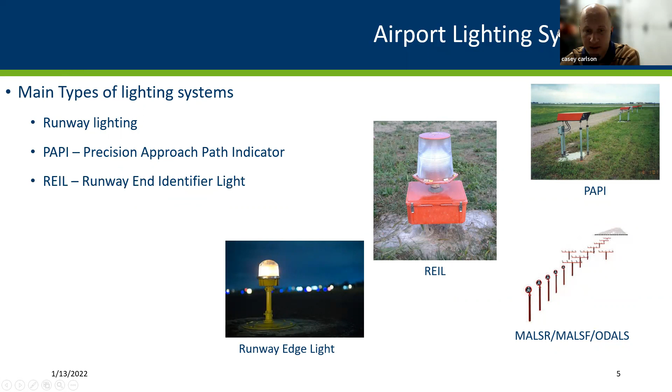Okay, here's some pictures of our airport lighting systems. Some of these fixtures you've seen out on the airfields - your edge lights, the lights up in the top right corner there. Excuse my coffee drink. Runway end identifier lights, REILs. And then in the bottom right corner, you have some of those MALSRs, MALSFs.

So sometimes these acronyms can be a little intimidating. If you sound out what that MALSR and MALSF is, it's not that technical - it's just a medium approach lighting system. The R and the F on a MALSR or MALSF are referring to the amount of flashers leading into that array, that approach lighting system. So that's kind of a brief overview of what you might see for airport lighting out on our sites.

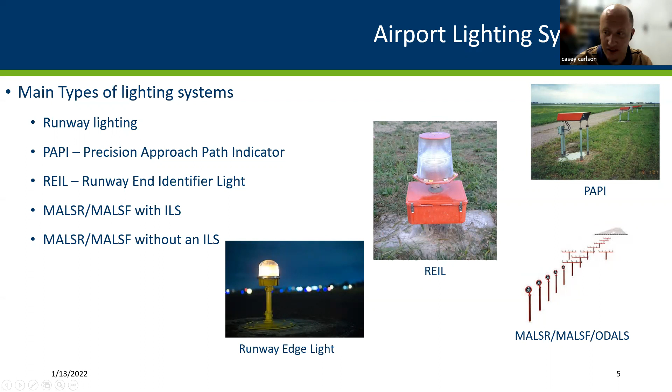I wanted to add that the purpose for those MALSRs and MALSFs is to reduce the required visibility needed to land during inclement weather. Whereas a runway edge light is showing you just the perimeter of your runway, your landing surface, those MALSRs and MALSFs are meant to gain your attention if you're a pilot coming in toward an airport in foggy or low-visibility conditions from snow. That would be the purpose of our MALSRs and MALSFs, to lead us into where we're trying to get to. We'll talk more about that coming up.

Whether it be PAPI lights or simple edge lights, how would somebody new to the industry know which airports have which types of lights, and how can we differentiate between key, intermediate, and landing strip types of airports? A couple pictures there - MSP, of course, on the right, is one of our state's largest airports. Off to the left, we just have a landing strip from a private airport in the Lakes area, Park Rapids area.

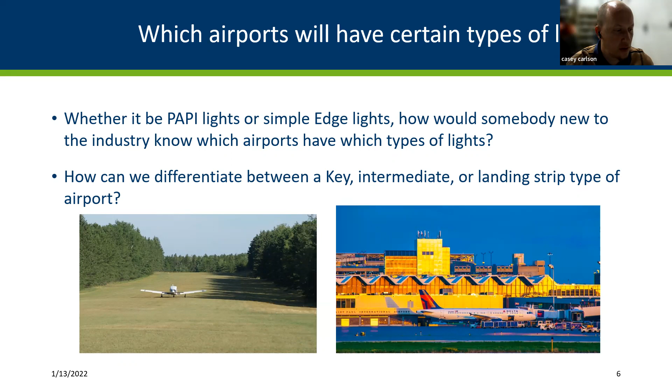Categorizing our airports into three groups: we have key airports, intermediate airports, and landing strips. If you can see in the illustration, our key airports are generally going to have an ILS as your precision instrument approach. So think of our larger airports around the state - they're the ones that would generally have an ILS.

Intermediate is the most common type of airfield we have across the state, with a vertically guided instrument approach - so we may have GPS or RNAV there, if you guys are familiar with those terms. And then, of course, the visual approach, like that grass landing strip in the previous slide.

So let's go through some of our smaller scale airports - what would we expect to see there, maybe lit or unlit. Lighted runways consist of runway edge lighting and end-of-runway lights. Generally, I'd say there's 8 lights on the end of each runway, split into 2 groups of 4, and the globes are positioned appropriately so that you can see green or red depending on what direction you're facing at the end of that runway.

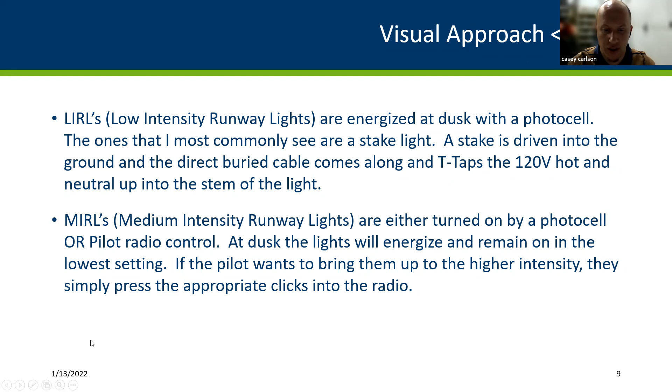From a troubleshooting standpoint, a LIRL is going to have a 120 volt, more conventional circuit that somebody could relate to wiring in their home, to a receptacle. It's a 120 volt circuit with a hot and a neutral. When we jump up into those MIRLs, that's where we get into the safety factor of a regulator and a constant current circuit, and there's a lot more safety concerns in dealing with that. So you do want to have a good understanding of it before you get your hands anywhere near that stuff for safety's sake.

Our intermediate airports have everything we saw on the previous sized airport, plus some additional things. It's our most common type of airport, with 63% being an intermediate. 24-hour 100 low-lead avgas is desirable, so generally we'll see that on these type of airports.

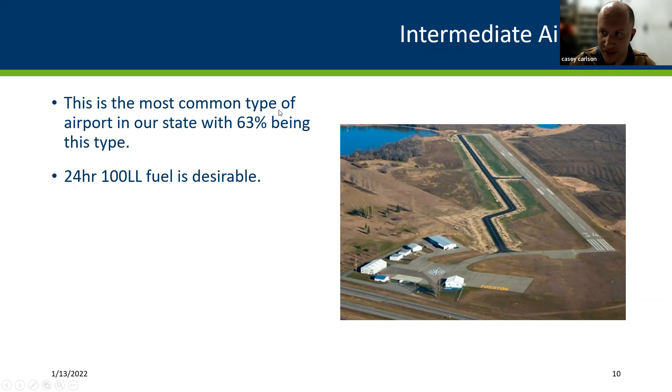Paved, and at least 1 instrument approach. In addition to all the lighting systems at a visual only strip, there's an expectation that intermediate airports will have PAPIs and REILs, if you remember those from the beginning of our slideshow. We'll speak more about those coming up.

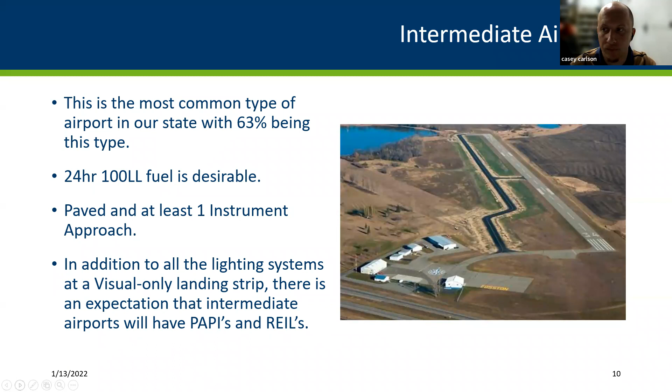Key airports have 5,000 or more feet of pavement, designed for heavier aircraft. I was stating in yesterday's presentation that I always think of a runway landing surface just needing to be a certain width and length to get those larger aircraft in, because they need more room to take off and land. But one thing I forget is that you've also got to have better or thicker materials to handle the weight of that aircraft as it's touching down.

A Key Airport has all the systems of that intermediate, and there's an expectation that the MIRLs will be upgraded to HIRLs on the runways associated with ILS. So some of our key airports will have a crosswind runway on the airport to supplement if aircraft come in and aren't going to use the main runway.

That main runway is going to have high intensity runway lights, and your crosswind might just have medium intensity runway lights. The distinction for a pilot's perspective is that high intensity is going to have 5 click settings for the pilot controlled lighting. So if you were a pilot coming in, you'd have 2 additional intensity levels aside from your low, medium, and high that you'd see with MIRLs.

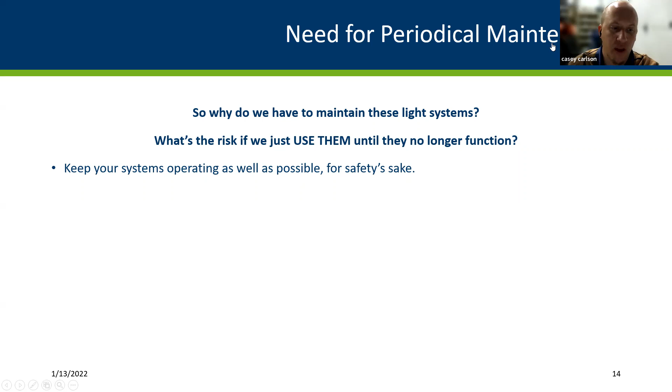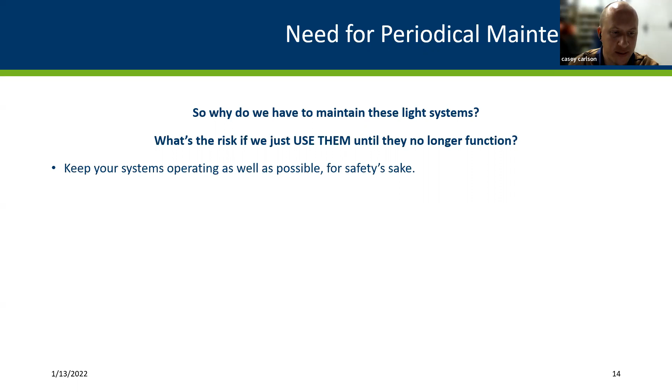Well, we want to keep our systems operating as well as possible for safety's sake. Pilots use these visual aids to assist in their travel throughout the airport, especially at night. And if a pilot controlled lighting system is unusable, it may create hazards and should be NOTAMed out immediately.

Skipped assessments of lighting issues tend to snowball into greater problems. We also want to keep our systems bright and shining to take pride in how well you can get your airport operating. It's the first impression people get about your town when they touch down at your airport. So if somebody's coming in on business and they see some of your lights are out, and then they return for business a couple weeks later and some of the lights are still out, that's something that gets noticed. And just how well you've removed snow in the winter, how well you've upkept all of your grass alongside of your lighting - all things that paint a picture of what your community is about.

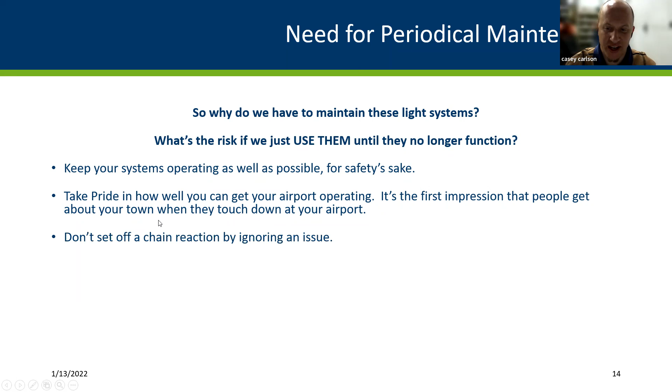We encourage not to set off a chain reaction by ignoring an issue. The human body is a great example - if you get a scratch on your arm, a week later you can't even tell the scratch was there. But on an electrical system, there aren't many self-healing type systems. So if something starts to fail, it's going to continue to fail, and it might not be the only component that fails - it may cause other things to fail. So something to be aware of.

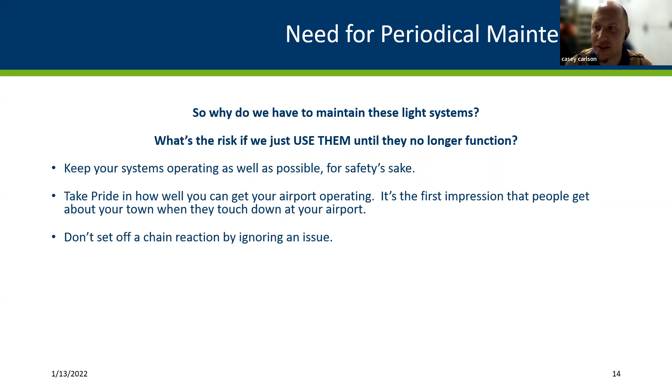Grumpy pilots equal less business opportunities. If pilots see that repairs are not being made in a timely manner, they may seek the services of a neighboring airport instead of your airport. So that's one set of eyes that's constantly touching down and evaluating, and can see if stuff is being well maintained. Pilots, of course, when they get together in the pilot's lounge, they talk about what they've seen and what they are seeing.

How often should we be checking? By having a maintenance program in place with a good calendar, you will be much more successful keeping up with everything. We want to encourage that you have some sort of calendar reminder on your phone or something to tell you that there are periodical checks that need to happen on some of your more technical lighting systems, such as PAPIs for one, and also those approach lighting systems. We're going to go through some of that here coming up.

So, a lighting maintenance plan is a good tool we can use to assess the status of our lighting system, determine if we are still meeting the design standards, and keep up with our lighting system maintenance before surprises cause shutdowns and costly repairs. A well-maintained lighting system will save you money by helping to avoid surprises. You'll know how much you save the first time a contractor comes out and charges big bucks for something that could have been addressed earlier during normal hours.

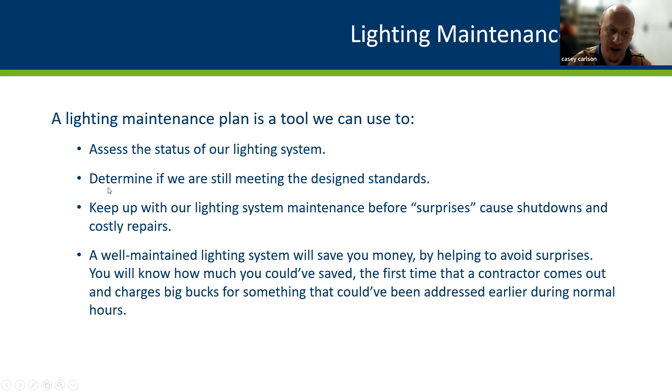So let's take a look at a few points from the FAA advisory circular, which we will use in designing how we will maintain our airports.

So here I've included a chart out of the advisory circular, and it's talking about edge lighting in particular, and what we would want to do on a daily, weekly, monthly, semi-annual, annual, or just unscheduled basis - do it when you can do it. But it's important, especially for the landing strip and intermediate airports, that you're going out in your vehicle and checking your lights as often as you can. And when I say as often as you can, not 4 times a day, but try to make it out there daily if you want to know what's going on and get a pulse for your airport.

A lot of times I imagine it's easy to come in as an airport manager, jump in the office, fire off 71 emails, and then do some work on something you had going from the day before. But it's important that we get out there and do our checks to know how our systems are working. You can see there are certain things that need to be checked monthly, semi-annually, and annually - those are the big ones, the ones we want to have in our calendar to remind us when we've got to get out and do those things, like alignments for your PAPIs. We'll get to those on the next couple slides here.

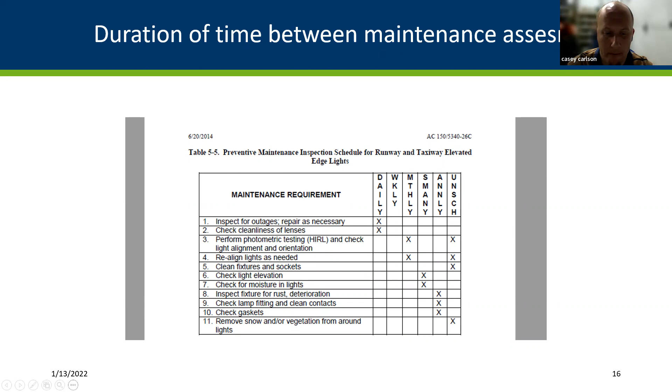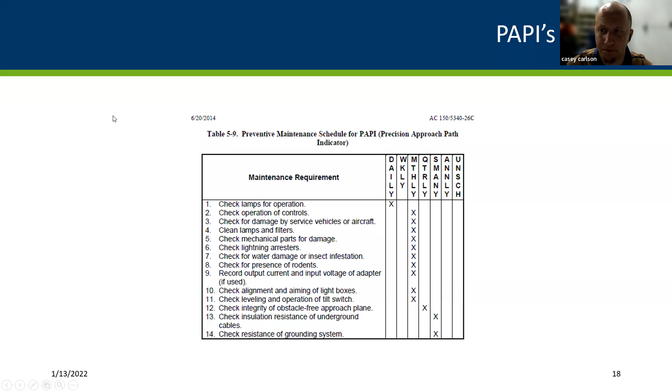Okay, so you are out on an inspection and you find something that's broke. So you have a broken component. Is there something more serious going on? What needs to happen? Make sure to notate your repairs in the logbook to track work performed. And this is paramount in isolating repeat problems that may become more of a sign of something more major that's happening.

So if you don't record what you're doing out there for your repairs on your airport, you might have a component fail and think, I just changed that last month, or I just changed that last week. What's going on? And then you look back on your chart to see how long ago you fixed it, and you have nothing marked down. And it's hard to isolate. You have to take good records so you can tell how your system is performing over time, and if you have a repeat problem. We don't know if a larger problem is looming due to a failing section of the system.

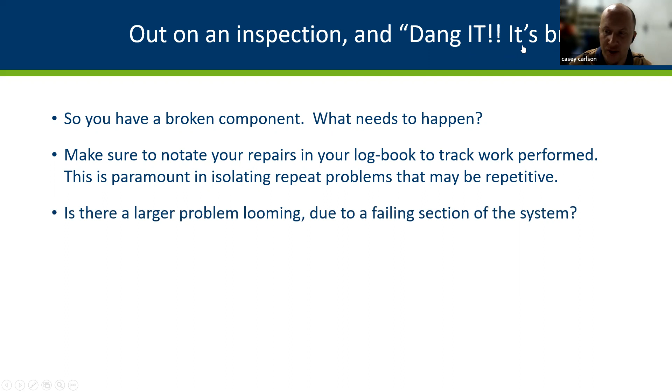And of course, you airport managers out there can reach out to us if you need help. From a pilot's perspective, though, you're going to get in touch with that airport manager to report anything that looks out of ordinary. And the airport manager can then use their staff to take a look at things and call in a local contractor or an airfield-specific contractor if they have a problem that is beyond the scope of day-to-day maintenance.

I want to look at a note here I had. It says most airports have a technician or airport manager handling bulb replacements on the runway. I mean, we change those bulbs all the time. Please practice safe procedures on this, folks. Series high voltage circuits are no joke. So if there were a fault in that constant current circuit, the loop, the airfield loop, is going to continue to ramp up or increase voltage in order to keep that system running so that it looks consistent at all times.

So if there is a connection that's starting to fail, the system's response to that is just to send more electricity. So some of these systems get up in the 1,000, 2,000 and higher voltage going up from there. So treat it with respect and be safe every time. Get in touch with a trained technician. For more technical issues, please notify myself or the nav systems team.

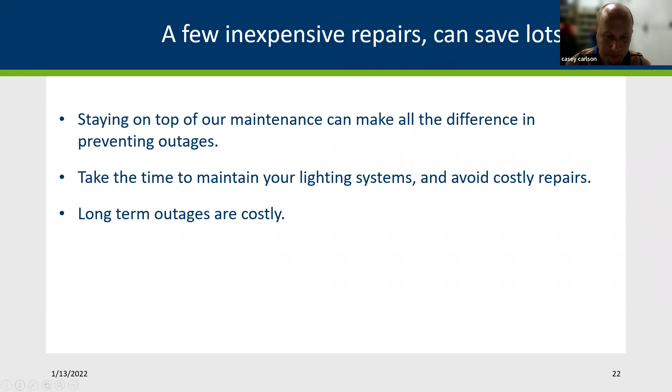Okay, one other item here for discussion, those contracts that we are in the efforts of putting together for purchasing. And some of you have already worked with me on ordering material for your airport. There's 2 companies that are already working with us under a purchasing contract, and that is Airport Lighting Company and ADB Safegate. We finally completed those contracts. There's a 3rd airfield supplier that we're working with, and they have submitted everything to get lined up, and we're in the final stages of getting them into the contract as well.

And I believe this next slide talks about why it's good that we have them under contract, but basically it gets us better pricing and availability. So let's take a look at that. Okay, yep, getting closer to fruition. Lock-in competitive pricing is a key factor here. I think from the first 2 companies, it's 10% below their standard retail is the price break that we're getting. Helps with product consistency across our state airports.

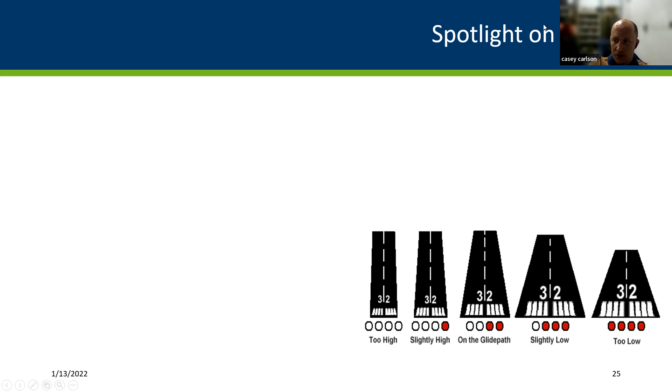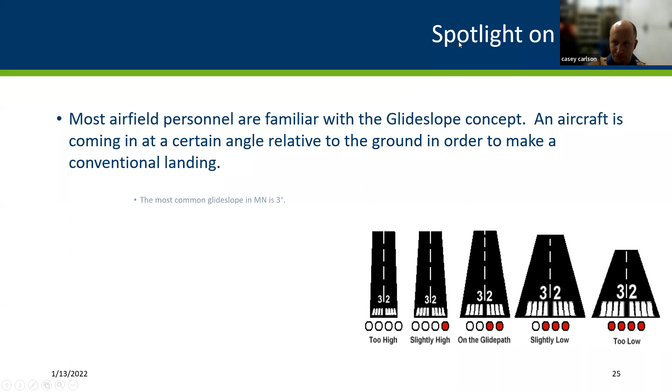Most airfield personnel are familiar with the glide slope concept. An aircraft is coming in at a certain angle relative to the ground in order to make its conventional landing. The most common glide slope in Minnesota is 3 degrees, and I believe 3 degrees is the most common everywhere. I just put in Minnesota there because I can speak for Minnesota. You may be wondering why would it be any different than 3 degrees? And the answer would be some type of obstruction. Could be trees or bluffs or a tall building that may have been there for a long time.

Some examples of some exceptions to that 3 degree glide slope would be Grand Rapids runway 5 is 3.5 degrees, and same with Forest Lake runways 13 and 31. Also, there are sometimes temporary changes made to the glide slope for construction operations.

Our friends up north in Baudette just completed an international bridge project up there. And they, of course, had cranes on site, which required a temporary rise of the glide slope. This is not a simple matter and requires a lot of paperwork and legwork to make sure that any pilots flying in would have the most updated information possible.

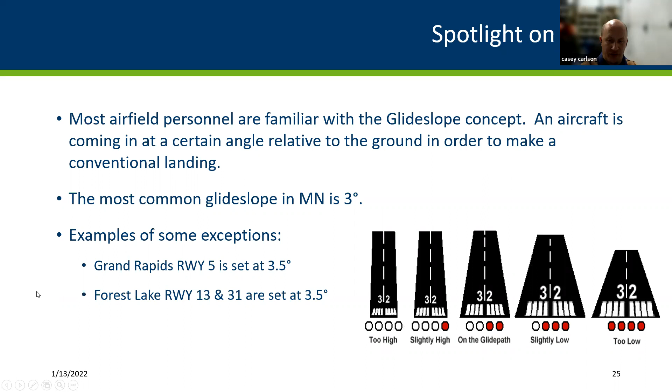So on a scenario like that, quite a bit of pre-planning went into getting that glide slope temporarily raised, and after the fact, moving it back down to where it was is going to be a bunch more paperwork. So we've just recently got the flight check set up so that we can get that switched back after their bridge construction was completed.

Okay, so I know my runway glide slope angle. Now what? Well, let's assume that the set of PAPIs at your airport will be set at the 3 degrees. How do we get them there? Most PAPIs across our state require the use of an alignment tool. There are some newer PAPIs in the marketplace now that don't require a tool because they have fixed digital aiming devices inside of them that can tell you the angle as you're adjusting it.

If you're an airport with PAPIs and have misplaced your alignment tool, it's imperative that you procure one. Without your tool, you won't be able to make your own adjustments. And I wrote seasonal in there just because the frost cycles are the most typical factor that kick our lights out of adjustment and require them to be adjusted back. So think of that frost heave coming out in the spring.

It's amazing how it can grab concrete cylinders and piers that are drilled 4, 5, 6 feet into the ground and move that whole thing. And when that happens, the alignments that we set up above are no longer compliant. So in the next slide, we'll take a look at a few pictures of these alignment tools.

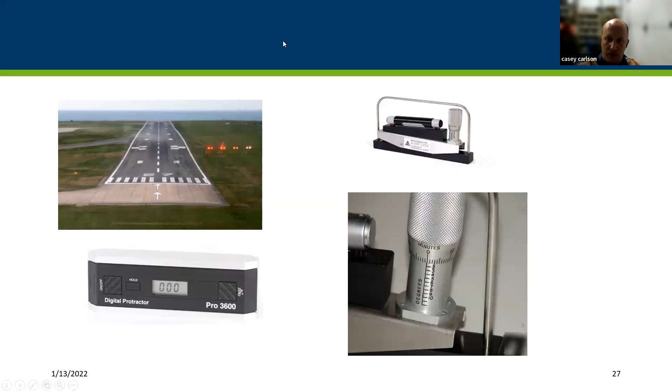Okay, so I've got my alignment tool in hand. We're ready for alignment. What do we need to know? Each tool is designed for a certain brand of PAPI. If you drove 20 miles to the next airport to get theirs because you lost yours, will it work? It's possible that they have the same PAPIs as your airport, but they might not. So how do these PAPI tools disappear?

So it can be something as simple and as innocent as the tool getting lost. It could be a contractor that came out to the airport to make an adjustment for you and they accidentally threw the tool in the back of their truck and it went off the airfield with them. There's several different things that can happen. Somebody can retire and they were the only one that knew where the darn thing was sitting on top of a cabinet somewhere. So it's something that you want to be very aware of and keep track of and know where that alignment equipment is at because it's necessary to have, definitely.

Verifying the appropriate alignment tool for your PAPIs is just a matter of looking up your manufacturer's instruction manual. If you don't have one, most of the time they can be located on an internet site. If you can get the make and model number off of the nameplate on the light housing itself, you can do an online search.

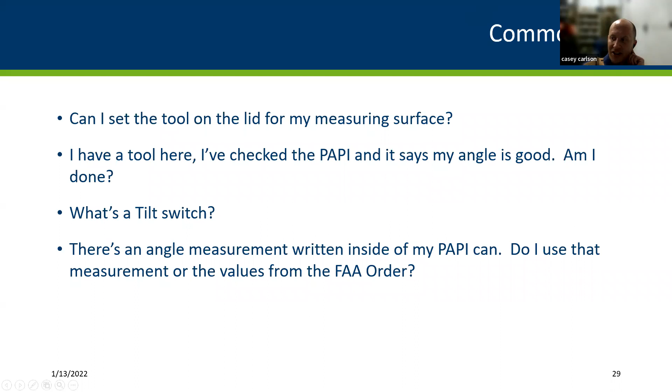And you, as a ground staff personnel, such as myself, I know that I've set the angles appropriately and they should be exactly on. But coming from the airplane with their FAA equipment, they can tell if there are slight deviations from what it should be. That could be just calibration of instruments or magnetics of the ground instruments. But the flight angle from that aircraft is the true angle we need to go by, because that's what all the other airplanes are going to be going by as they make approach on that runway. So they give us the tuned angles, so to speak.

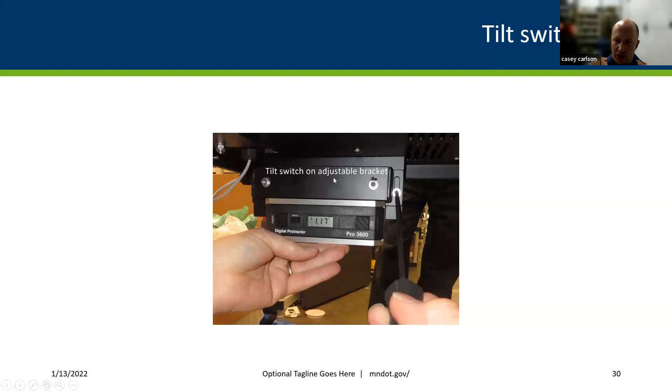Here's a picture of a tilt switch that I found online. It was difficult to find a good one, but you can see that tilt switch inside of where it's written the words tilt switch on adjustable bracket. Inside of that box is where the tilt switch's components are working together to determine if that light housing assembly has moved or not, or if it's still as it should be set. So if you got your alignment angle set properly on the can, this is the last part of that equation where you would zero this out so that it could watchdog your system. Right here it shows 1.17. Most of the time, you would zero that out so that it could keep a good track on where exactly the angle was. That's your watchdog in the system, is that tilt switch.

Okay, I got a few more questions here you might be thinking about. You say 3 degrees, so I just set all 4 cans at 3 degrees and we're good to go, right? Well, that's not the case. Each can has its own angle. Can 1 is always closest to the runway and is raised at the highest angle. From there, the angle decreases with each subsequent lighting assembly, each fixture.

Where can I get bulbs? My normal source is back ordered. There's about 4 different sources that we normally use in procuring bulbs or anything that you need for this type of light. If you're having trouble getting something, please reach out to me directly and I can help point you to an alternate source.

What's the tolerance on the angles according to FAA? Plus or minus 6 minutes would be the answer to that. So if you know your angle inside of your PAPI can, the allowance is plus or minus 6 minutes from that. And that's not that much. I know you folks are thinking, man, when I get out there with my wrenches and threaded rods trying to get it just right, as soon as I tighten the nut down, it throws it 3 more minutes away from where I wanted to set it. It's challenging at times and can be a little tricky, but it's really important. Be patient. Don't go out there in a rush to set your angles. Go out there with the intention that once I get this done, I don't have to deal with it again for a while, and I want it to be as exact as possible.

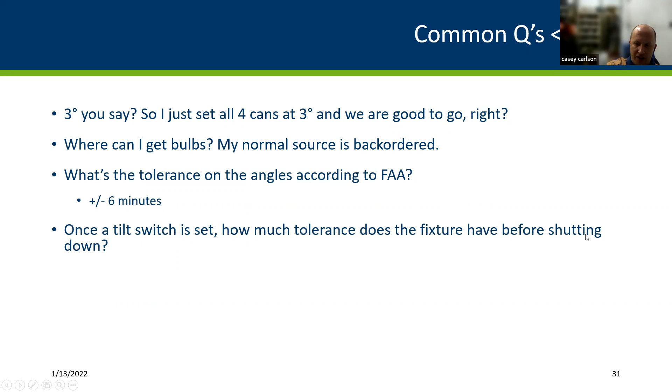One last item here. Once a tilt switch is set, how much tolerance does the fixture have before shutting down? I found this interesting. Per FAA, the tilt switch must open if 30 to 60 minutes high. Well, 60 minutes high is a full degree. So I found that to be alarming. I thought that would be a lot tighter tolerance before that tilt switch shuts down that fixture. And of course, when one fixture shuts down because it's in tilt condition, it's going to shut down the other 3 cans alongside it as part of the PAPI array. So think of it this way: if you have a tilt condition out in the field at your airport, it's probably a bigger deal than what you'd expect. Like, why is the ground moving that much so that it can knock one of my light assemblies off a full degree?

But that's just on the high side. On the low side, it's a tighter tolerance. They're more concerned with that PAPI drooping down and giving false information on the low side. But I found that 30 to 60 minutes high an interesting range. I thought it would be a tighter tolerance, being that they want us within plus or minus 6 minutes. But then that tilt switch has a lot more tolerance before it has to shut down the lights. So an interesting factor.

Each manufacturer may differ though. Some of them may have less forgiveness before entering a tilt condition. So this is the maximum allowable, but some of those tilt switches are set a lot more tight of tolerance, a lot closer to that 6 minutes. So it's going to shut your fixture down a lot faster.